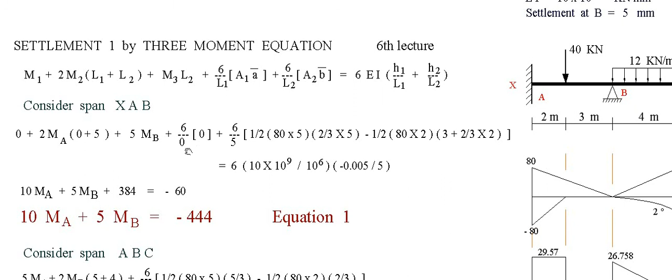Plus the moment on the right is this one. Moment on the right is moment at B times 5. Then the constant, the first constant is the imaginary or 0. This is 0, so I did not place anymore this 0 here. Then the second constant is 6 over L2 or 5. The second span of XAB is AB or 5.

Then the moment by parts is the area is 1/2 80 by 5, is 1/2 80 by 5. The centroid from B is 2/3 of 5. The origin of the measurement of the centroid, if we consider the moment by parts on the right, the origin must be on the right. On the left, since this is imaginary here, there is no moment. The origin must be on the left. The figure on the left must have the origin on the left. On the right, the origin must be on the right also, or at B. So this is the centroid, this is 2/3 of 5.

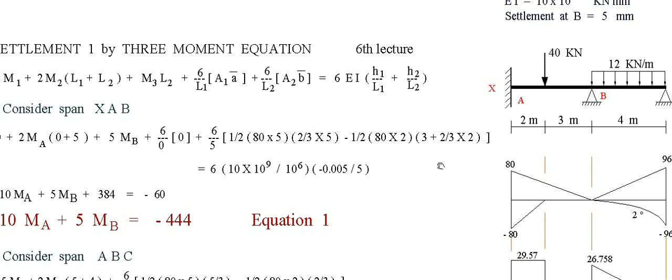So then equate that to the settlement. 6 EI, the EI given above, 6 EI then divided by 10 to the 6, since the unit is kilonewton meter square, mm square, mm convert to meter, we divide this by 1000, then square, or 10 to the 6. Then it's over L, we don't have the H over L on the left.

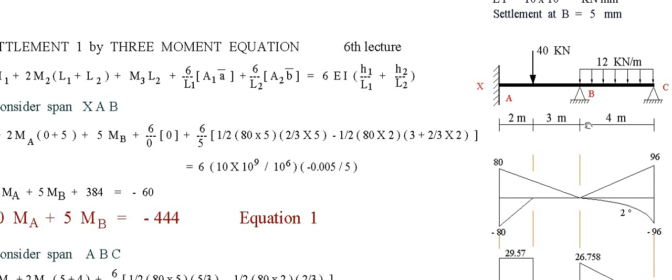Then minus 0.005, 5 mm divided by 5. Now, why negative? The origin for XAB, the center one is A. Now, B is lower by 5 mm. A is higher, B is lower. So, we are referring to the settlement at B lower than A. So, it is negative 0.005 divided by 5. So, sometimes this is negative, sometimes positive, it depends.

So, simplifying, 10 MA plus 5 MB, the constant here on the left, this is on the right. The constant on the left is this one. Then constant on the right, the settlement is this one. So, simplifying, transfer this negative, transfer on the right. So, 10 MA plus 5 MB is equal to minus 444. And this is equation 1.

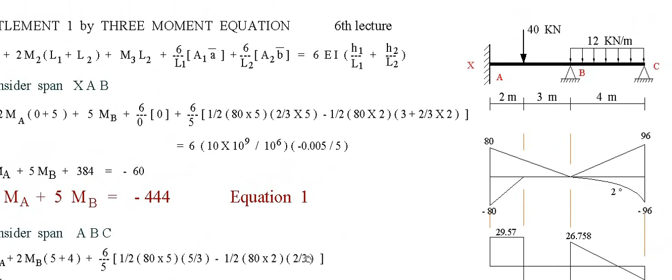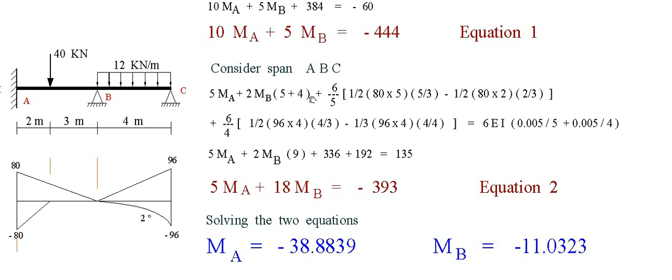Then, another equation, since we have two unknowns, moment at A and moment at B, we have to have two equations to solve for the moment at A and B. Another equation, if we consider the span ABC, a real beam ABC. So, moment at A, substitute to the basic equation. Moment at A is unknown times 5 plus twice the middle moment, or B, twice moment at B, the sum of the two span, 5 plus 4, then plus the moment at C on the right. Now the moment at C is 0, so I did not place anymore the 0 here, plus 0, then plus...

The formula, 6 over this one, the first constant, 6 over 5, times the area on the left. We have two spans, we have two moment by parts on the left and on the right. So that is why we have two constants, left and the right.

So on the left, 6 over 5 times 1/2 of 80 by 5. The distance on the left is 1/3 of 5.

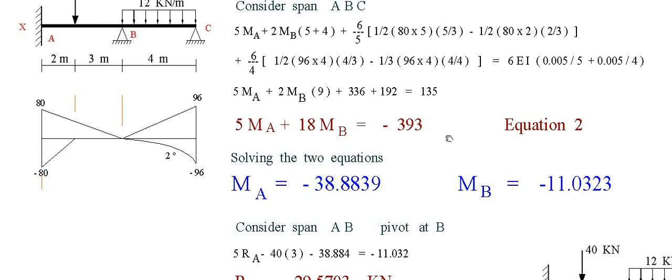Okay, to solve for the reaction, consider this cut section at B. On the left, we have AB. Look only on the left of the cut section at B.

The moment at A is negative, so it is counterclockwise. Moment at B is also negative, counterclockwise. It is negative whenever the beam appears to have cracking on top, the moment is negative. So counterclockwise tends to break the beam on top, or there is a crack on the top of the beam if we have this rotation.

On the right, we have this rotation due to 40. On the left, moment at A is negative, moment at B is also negative. It is clockwise. So this negative moment seems like there is a breaking of the top fiber of the beam at B. Negative, it is clockwise against this positive counterclockwise rotation of the 40, like that. So the moment at B is like that. So there is cracking on the top of the beam at B.

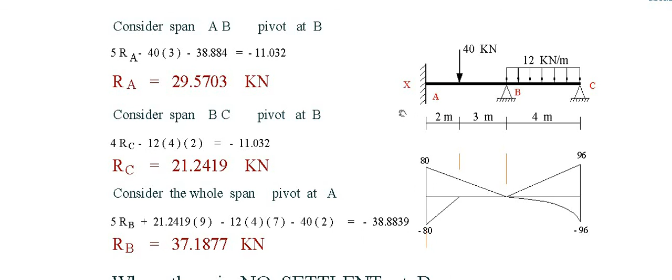So these two moments at A are opposite to this moment at B. To solve the reaction at A, moment at B is equal to 11.032. Sum up all the moments on the left, must equal the moment on the right. On the right is minus 11.032.

Okay, the moment on the left is 5 RA, this is clockwise, minus 40 times 3, this is counterclockwise with respect to B. RA is positive. Now the moment at A is in this direction, the same direction as the 40. Moment at A is minus, same direction as this 40, minus 38.884. Equate that to the sum of the moment at B, which is minus 11.032.

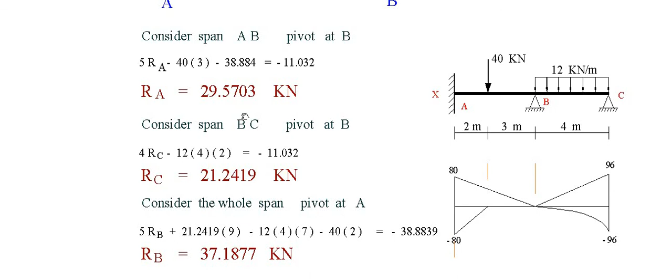Okay, solving for RA, this is 29.5703. We have only one unknown. Then to solve for the reaction at C, cut section at B.

Consider the cut segment on the right, BC. There appears the moment at B as counterclockwise, and there is no moment at C. So RC times 4, take moment at B, minus 12 times 4 times the distance of 2 from here up to the centroid, 12 times 4 times 2, and equate that to the moment at B, minus 11.032.

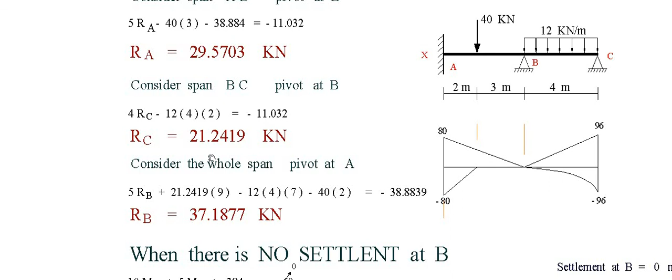We have one unknown, RC. Solving for RC, it is 21.2419.

Then consider the whole span ABC. I want to solve RB. RA is known, RC is known, moment at A and moment at B are known. We have only one unknown, RB. So for the whole span, taking moment at A, we have RB times 5.

Plus the reaction at C, 21.2419, times 9, minus uniform load of 12 times 4, distance from A is 5 plus 2 or 7, minus 40 times 2, equal to the moment at A, or minus 38.8839.

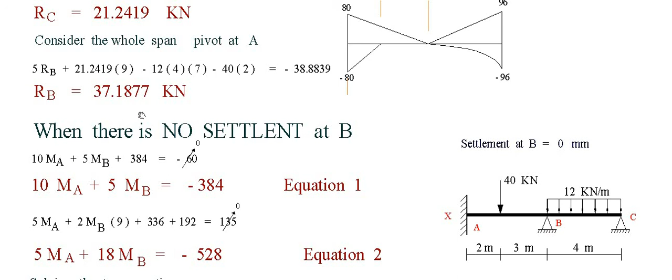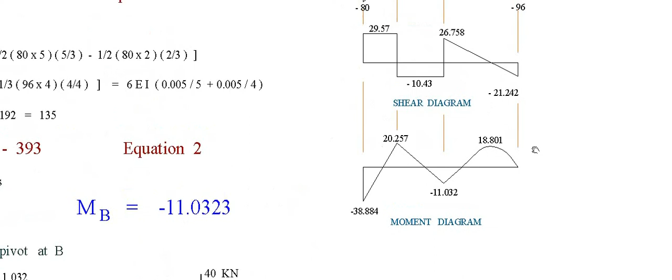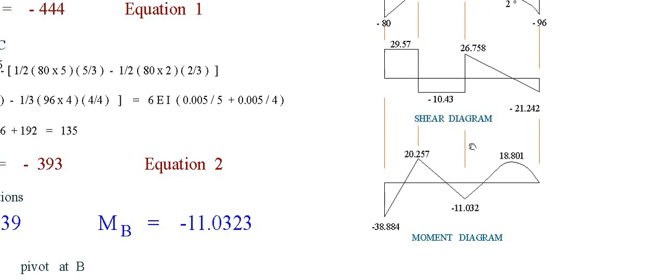So we have solved now the three reactions, and the two moments at A and at B. Then drawing the shear and moment diagram, you have this. Now the topic on how to construct the shear and moment diagram is under strength of materials, and I will not discuss this anymore.

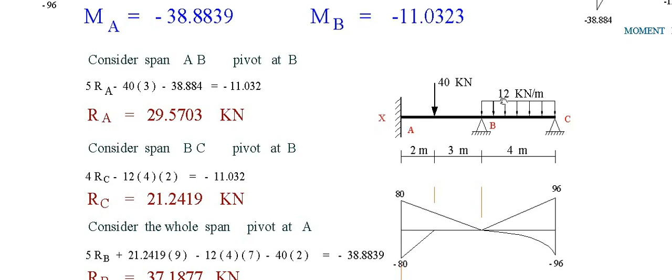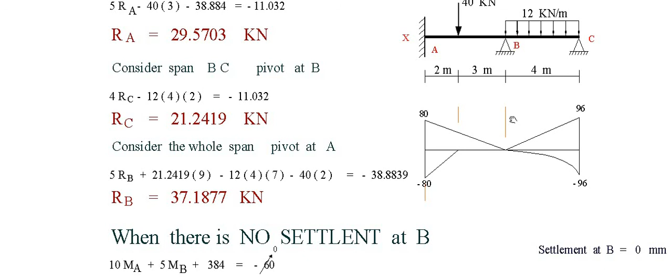And that completes now the solution of this problem with settlement. Now if we remove the settlement, or consider settlement at B as 0, just an ordinary three-moment equation, the solution is very simple.

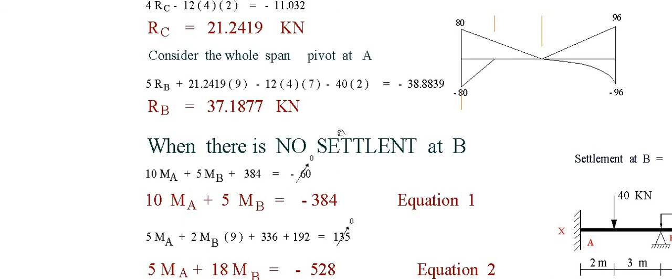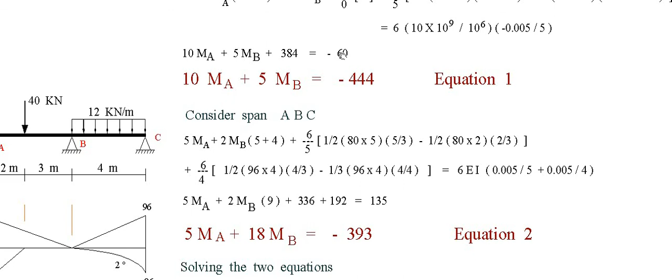The first equation is the same as above, where there is minus 60 for the settlement. If we remove the settlement, equal to 0, no more settlement, equation 1 simplifies to the constant minus 384. Then for equation 2, we also remove the settlement, and the constant now is minus 528.

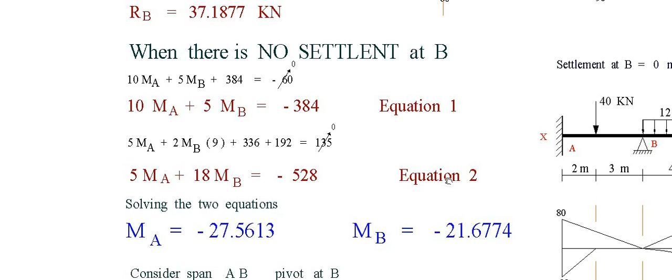These two equations will now be solved by simultaneous equation, and the answer for moment at A is minus 27.5613. Moment at B is minus 21.6774.

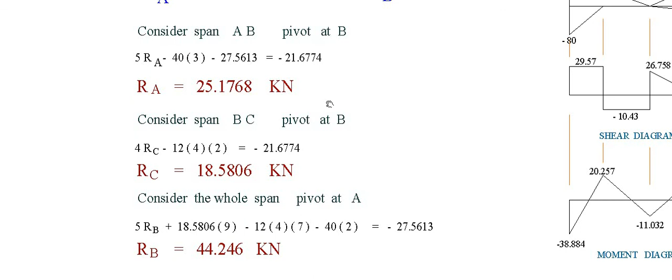Kilonewton meter. Then solving for the reaction, similar to the discussion above, only the moments are different. Moment at A, moment at B, these two are this. So RA is...

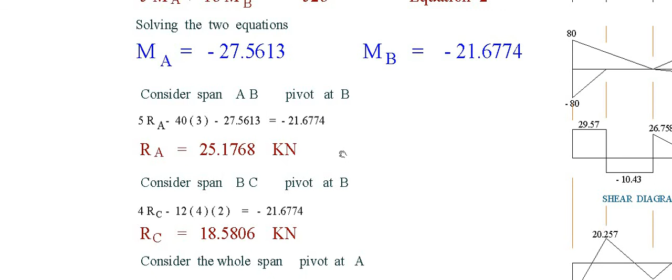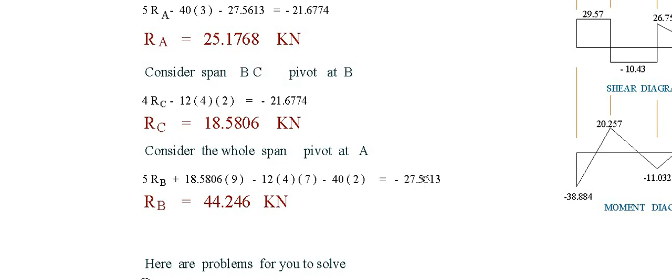25.1768. Then consider BC, the same concept, only change the value of the moment at B. So RC is 18.5806. Then for the whole span, solving for RB.

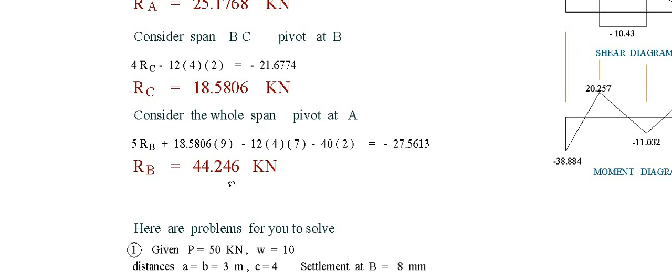Okay, the same pattern, the same solution, only that you change the moment, this and this. So RB is 44.246. The drawing of the shear and moment diagram is almost the same, similar to this, but the values are different.

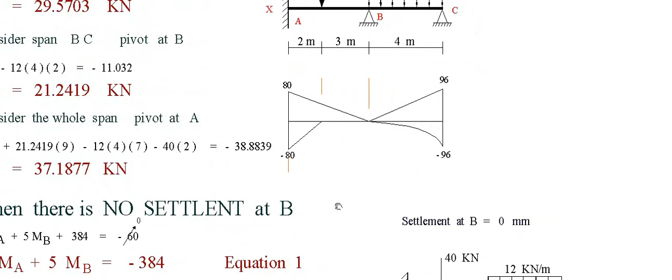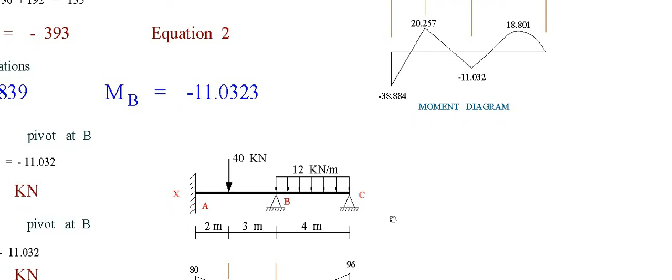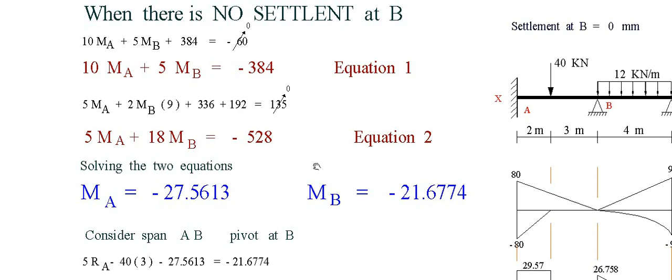For no settlement. Okay, that ends the discussion for the settlement and no settlement for the beam. Actually, we solved two beams, with settlement and no settlement.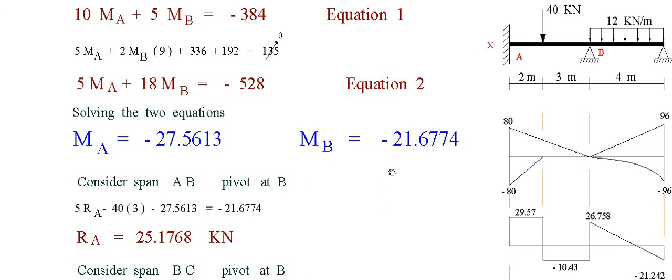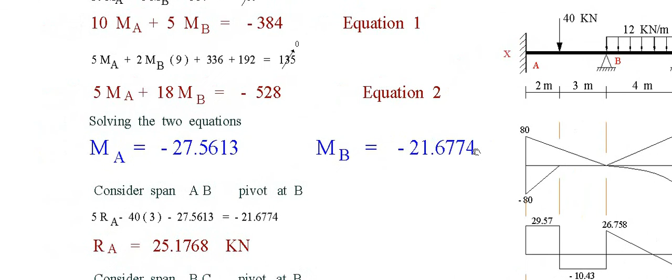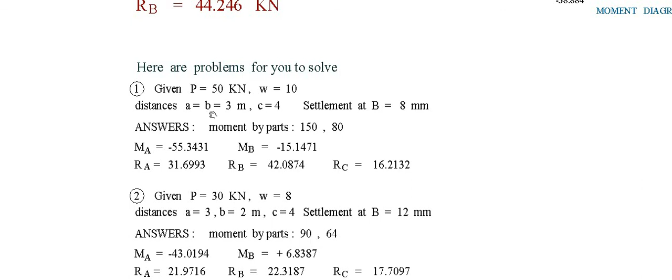In order to challenge you, I have here two problems, the same figure, only that the value of P is now changed. Instead of 40 and 12 for concentrated load and uniform load, change that to 50 and 10. Then the dimension A and B is equal to 3, previously these are 2 and 3. So new problem, A and B equal to 3, C equal to 4, and the settlement is 8.

Given settlement at 8, the answer for moment by parts is 150 and 80. Then the two moments are this. Then the reaction, you solve this and follow this if you got it right. Moment here, the two. Read the answers for you, just check if you know the solution.

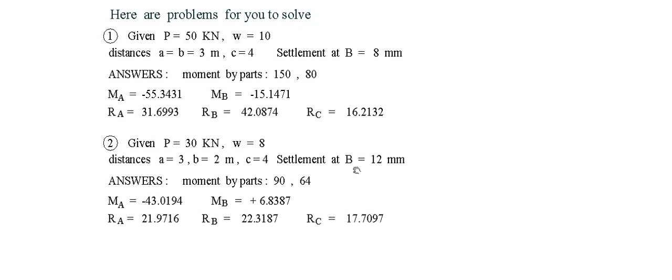Then the second problem, we have this also. Change the P and the W to 30 and 8. A is 3, B is 2, so you reverse the dimension of A and B. C is 4, settlement at B is 12 mm. The answers, we have this.

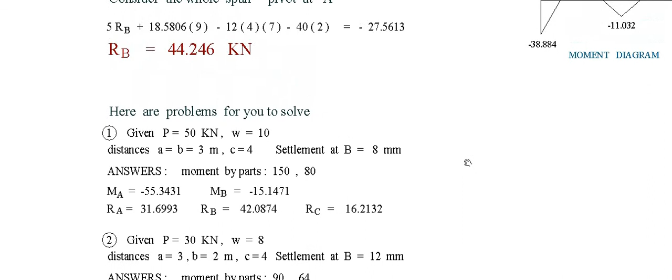Okay, I hope you understand this, and I hope you learn how to solve the three-moment equation with settlement.